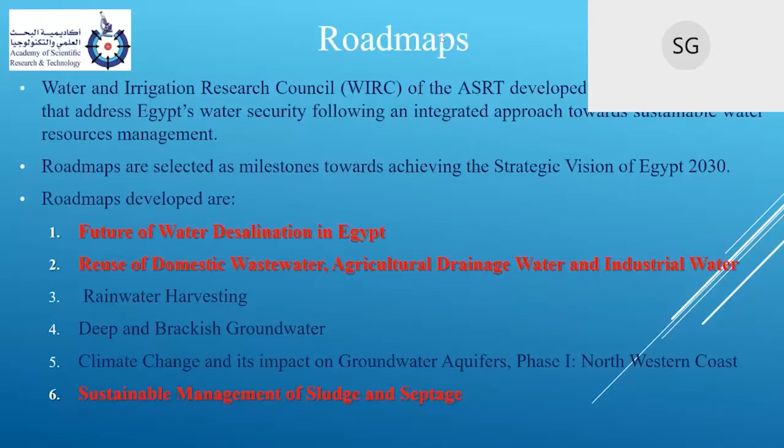A third one on rainwater harvesting. A fourth one on deep and brackish groundwater. And lately, we just finished 2 roadmaps, one on climate change and its impact on groundwater aquifers, and for the first phase, we concentrated on the northwestern coast. And last but not least, the sustainable management of sludge and septage. So today, we're going to present to you three roadmaps, the ones highlighted in red, and the first one will be on the water desalination roadmap.

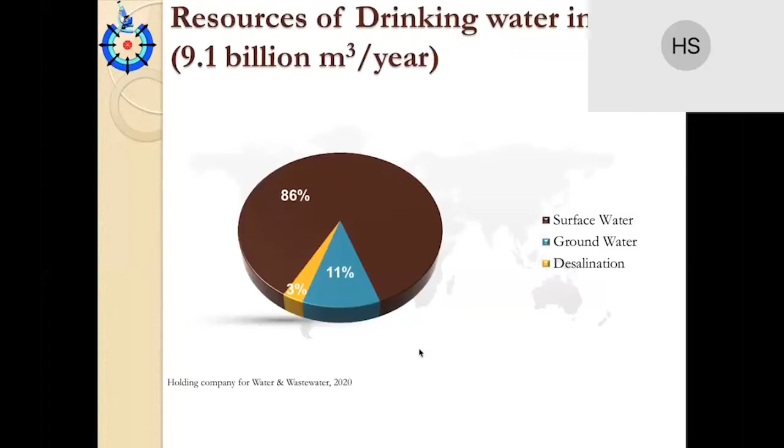We are drinking 9.1 billion cubic meters per year. 86% of these are from surface water, 11% from groundwater, and 3% from desalination.

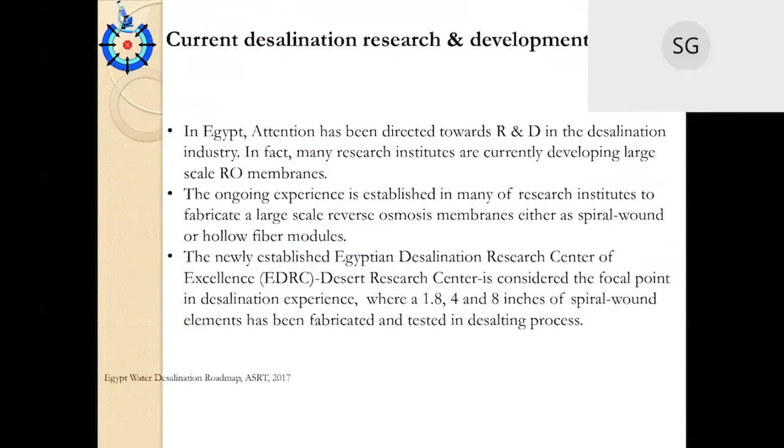Something goes wrong. Actually, I don't know why the presentation keeps moving. Okay, I will present like that because actually something is wrong with the slideshow.

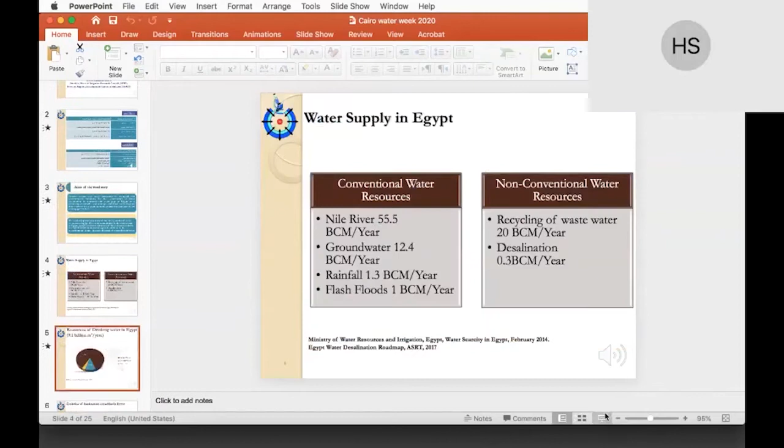When we made the first roadmap for the desalination in 2011, this number was expected to be 1.5 million cubic meter per day in 2037. And when we made our second roadmap, we were estimating that this number will be 2.6 million cubic meter per day.

But 1 month ago, this number actually jumped to be 8 million cubic meter per day as presented by the Minister of Irrigation. And we are expecting, in the year 2050, to be 20 million cubic meter per day as desalination. So the number is actually going very, very fast in the desalination.

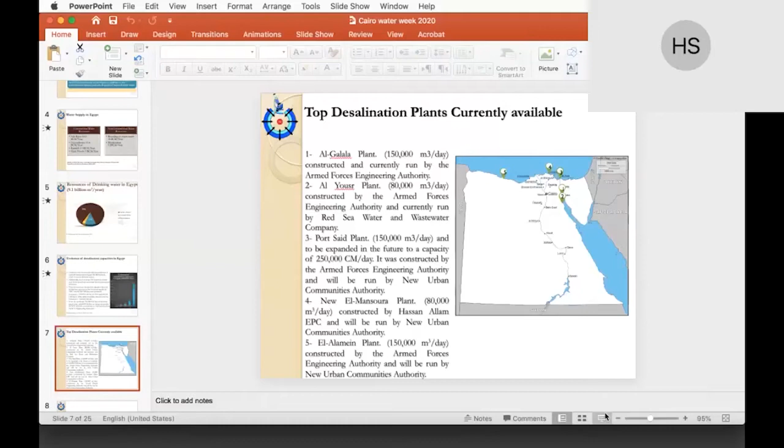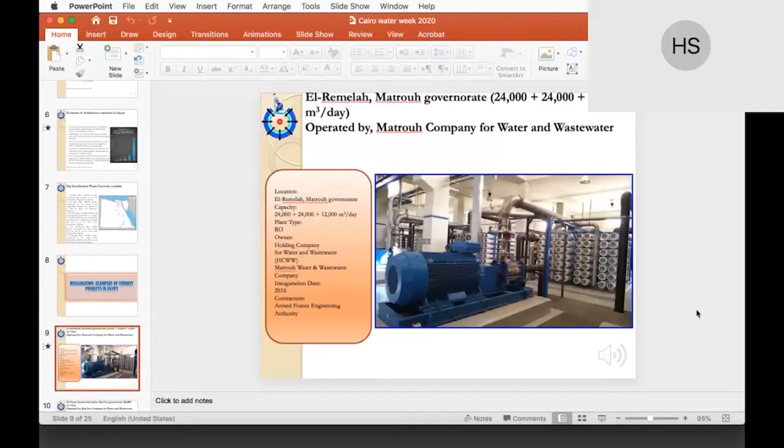These are some examples of our desalination plants and also the operation, because actually operation and maintenance of the desalination plants vary from one location to another. So, for example, in Matrouh, El-Remelah desalination plant, which is 48,000 cubic meter per day, is operated by Matrouh Company for Water and Wastewater. Another desalination plant, Al Yousr, is operated by Red Sea Company for Water and Wastewater, which is 80,000 cubic meter per day, as I mentioned before. El Galala desalination plant is operated by the Armed Forces Engineering Authority.

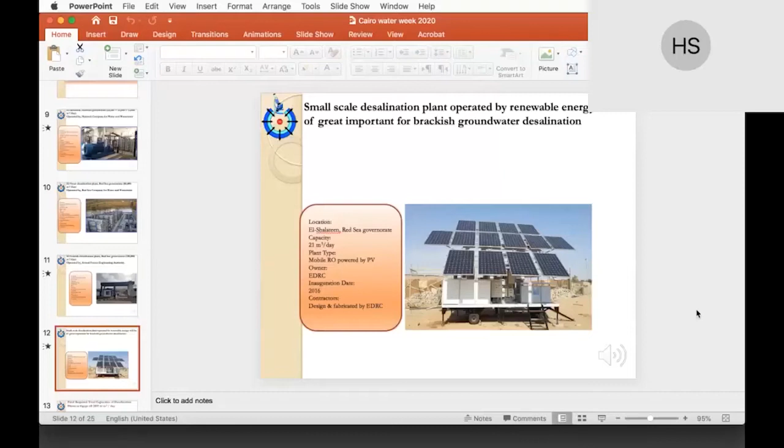And also we have some small desalination plants which are operated by renewable energy and depend on brackish groundwater. These kinds of desalination plants are getting much attention in Egypt now, because the cost of the desalination plant depends on the salinity of water. So if you have brackish groundwater, you will have desalination with minimum cost rather than desalination of the Red or Mediterranean Sea. But of course, this type of desalination plant will always be on a small or even very small scale, located in some areas.

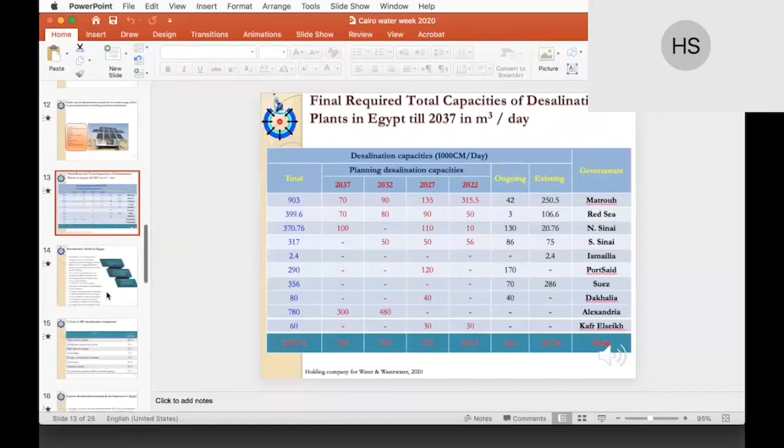Okay, we have desalination plants. What about the desalination tariff, which is very important in our roadmap? The construction cost of 1 cubic meter of desalination plant capacity varies from $800 to $2,000 US dollars per cubic meter. For the mega project, the number is 800, and this number increases as the size of the desalination plant decreases. 25% of the construction cost of the desalination plant represents the annual operating and maintenance. Power consumption is 4 to 4.5 kilowatt hour per cubic meter. This is the electricity consumption. And this number can be reduced by a lot if we work with groundwater or brackish water desalination plants. The power consumption will be lower.

13 Egyptian pounds is the tariff cost of the cubic meter of desalination by the Holding Company for Water and Wastewater. The cost sharing of the 800 US dollars: the high pressure pump represents 20%, membrane represents 15%, and the other cost is 65%. But the most important two costs of the desalination plant are the high pressure pump and the membrane, and also the membrane represents nearly 1/3 of the maintenance cost of the desalination plant.

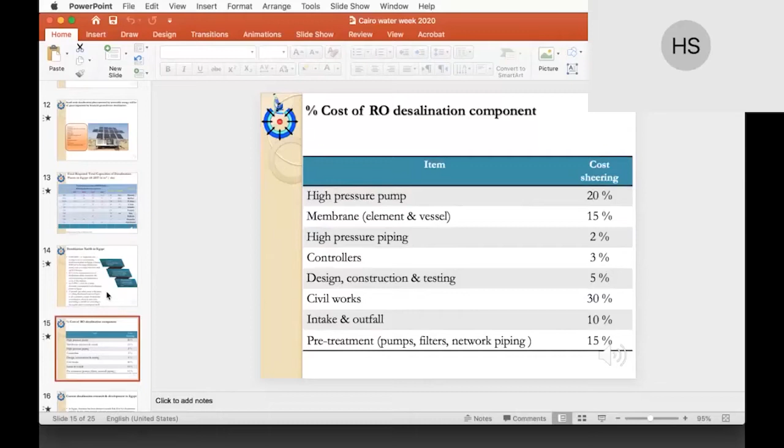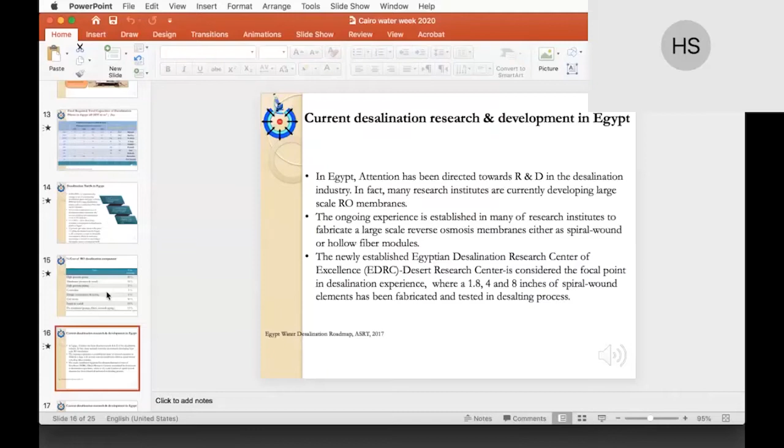Actually, the desalination R&D in Egypt is also going in parallel with the desalination plants being constructed. So we have a lot of ongoing research. For example, we have a newly established EDRC, which is the Egyptian Desalination Research Center of Excellence. In this center, they are conducting a lot of research concerning R&D, and specifically the fabrication of the membrane element. As I mentioned, the membrane element represents 1/3 of the operation and maintenance cost of running a desalination plant.

We also have the Water Desalination Alliance, which is conducted by the Academy of Scientific Research and Technology. In this alliance, we have two main R&D groups working on the high pressure pump, and we succeeded in building the first high pressure pump in Egypt, which is a 200 cubic meter per day high pressure pump. We also succeeded in rolling the first 4 and 8 inch RO membrane elements as the first step of the alliance, and we expect by the end of the second step to have the 4 and 8 inch RO membrane elements completely fabricated in Egypt.

We also actually succeeded in designing and manufacturing the first desalination membrane element fabrication line in Egypt, consisting of a casting machine, a coating machine, and rolling machines.

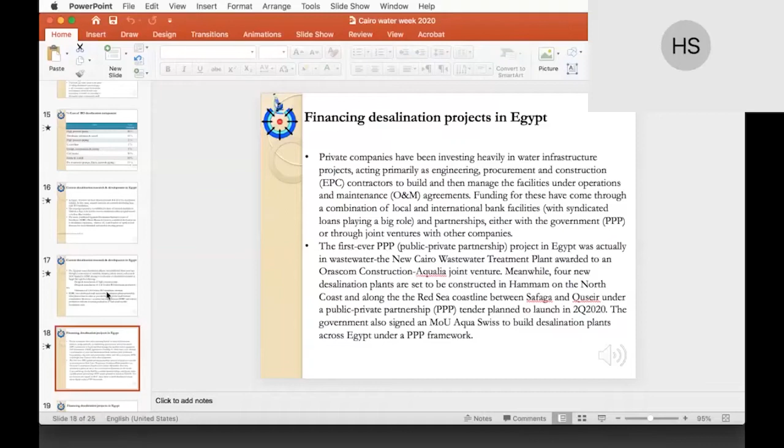Financing of desalination projects was also an important part of the roadmap. Most of the finance now is from the government, but private companies are also investing heavily in water infrastructure projects. Until now, it has focused mostly on wastewater, but the future of PPP, public-private partnership, in desalination is expected to be in 4 new desalination plants in El Hammam, the North Coast, and along the Red Sea coastline between Safaga and Quseir under a public-private partnership. The tender is planned for the second quarter for these 4 desalination plants.

Orascom is also investing a lot in the wastewater sector, and they are also part of the desalination plant in El Galala, as I mentioned before, and Hassan Allam are financing the desalination plant in New Al Mansoura.

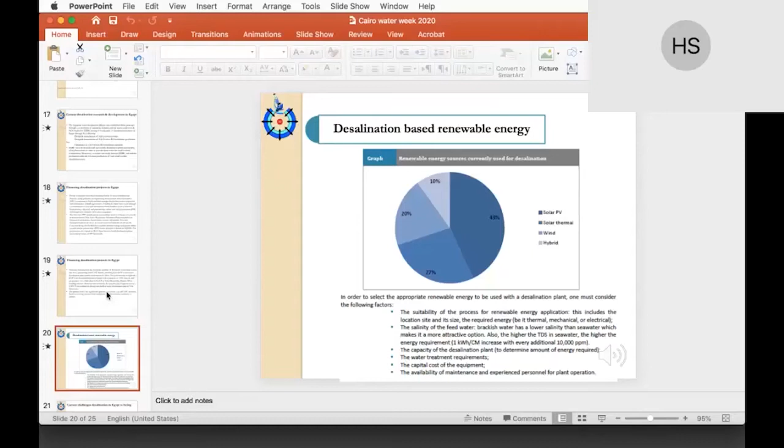Renewable energy, and the use of renewable energy to power desalination plants, is considered a lot in our roadmap, because, as I mentioned, power consumption represents nearly 40 to 45% of the cost of a cubic meter of desalinated water. So relying on renewable energy is receiving a lot of attention, especially solar PV. Some desalination plants running on solar are found, especially groundwater desalination plants and small scale desalination plants. Solar PV represents 43% of the renewable energy used in desalination plants.

The challenges of financing desalination plants in Egypt are many. Among them: government guarantees for contracts, lack of a constitutional setup to regulate the relationship between the private sector and government, the regulatory framework in Egypt, public infrastructure readiness, water tariffs and selling price, high energy consumption, high investment and operational cost, lack of local expertise and know-how, and environmental impact and health effects.

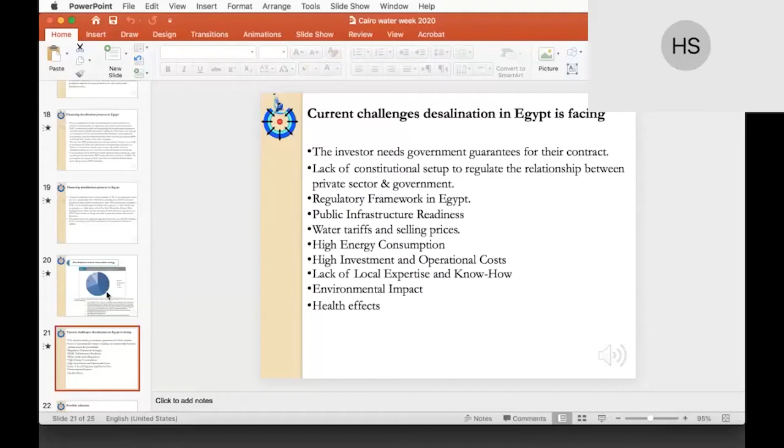Possible solutions are to increase capacity, knowledge and value added to the economy from desalination, including plant design, manufacturing and construction; create incentives to attract local businesses to invest in manufacturing, designing, building and operating desalination plants with a local and Arab labor force to attain economic sustainability; expand and support digital self-training programs; set up extensive educational specializations and social partnerships in desalination and water treatment; and develop a national plan for the use of renewable energy and reduction of energy used in desalination.

Develop comprehensive environmental legislation related to desalination, selecting a representative for authorities and agencies to give desalination units licenses, and a concerted effort by all parties and bodies involved in water desalination in Egypt to develop a map of seawater desalination coastal areas.

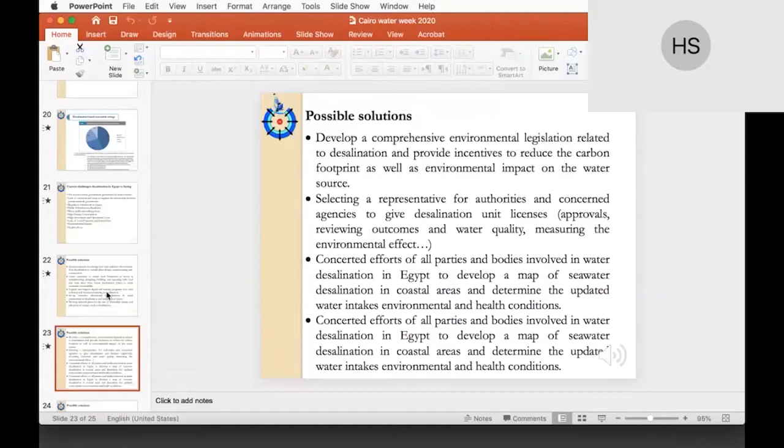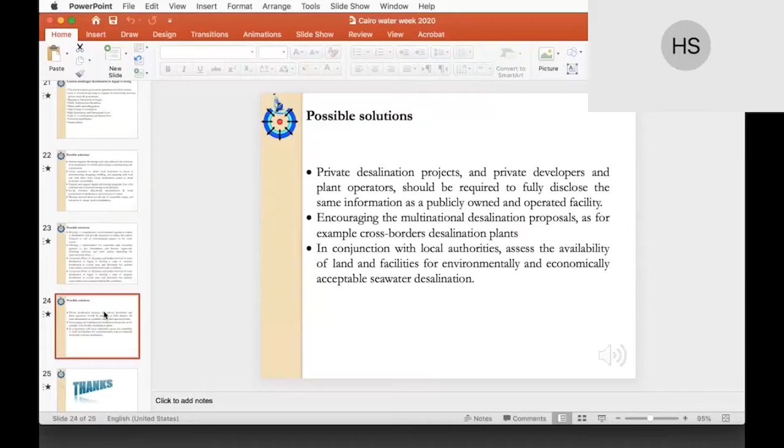Finally, private desalination projects, private developers and plant operators should be required to fully disclose the same information as a publicly owned and operated facility, encouraging multinational desalination proposals, for example cross-border desalination plants, in conjunction with local authorities assessing the availability of land and facilities for environmentally and economically acceptable seawater desalination. Thank you very much.

Thank you very much, Dr. Hossein, for your informative presentation about the future of desalination in Egypt. In fact, you highlighted very important points regarding the current and future situation of desalination and how desalinated water can play a vital role in closing the gap between supply and demand.

I would like to add one thing to this, that the STDF, the Science and Technology Development Fund, has funded several projects on desalination based on the output of this roadmap, highlighting the different focuses and different areas that could help in adopting this technology in Egypt through the roadmap. It also helped us through the fund organized or supported by the STDF.

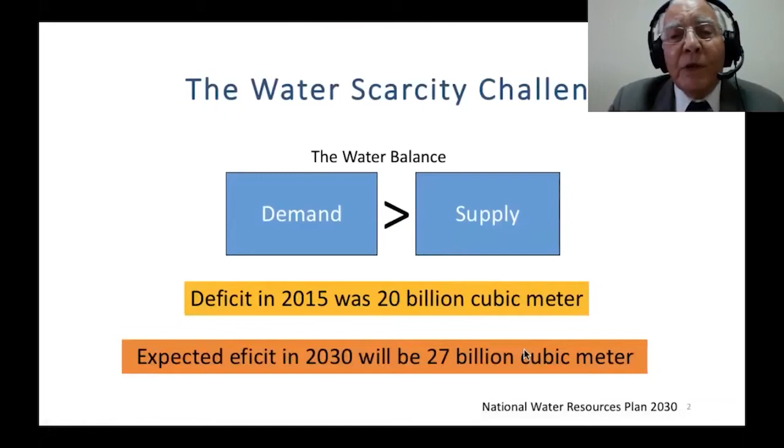I think the starting point, when everyone talks about new water supplies, is the deficiency between supply and demand. We have demands exceeding supply, and the deficit is increasing every year due to population increase. In 2015, the deficit between supply and demand was 20 billion cubic meters. Expected, according to the National Water Resource Plan, in 2030 it will be 27 billion cubic meters. What is the country doing about this? There are different options and different strategies. Number one is non-conventional water reuse, which includes agricultural drainage water and treated wastewater.

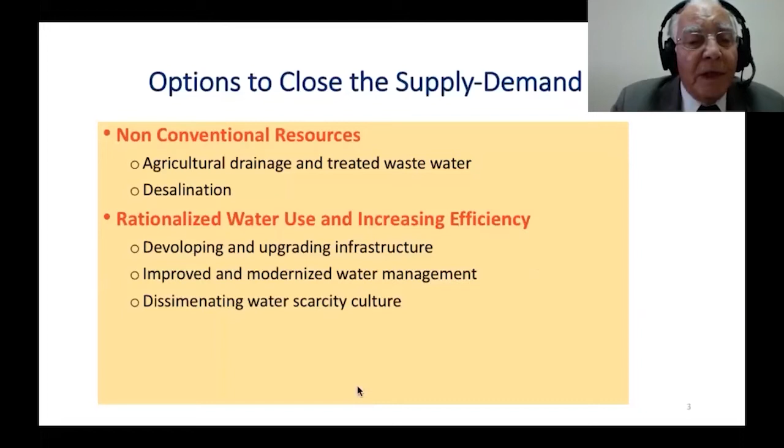Desalination was covered by my colleague, Dr. Hassam Shaw. The second option is rationalizing water use and increasing efficiency, and this is the most important part because the user is part of those policies, not only the government. The last one is increasing Egypt's share of Nile water, and everybody is aware of what the country is doing to keep and defend our share, mainly through scaling up cooperation with the riparian countries, and second, by implementing shared projects to capture the upper Nile losses, which are tremendous and can satisfy many of the riparian countries.

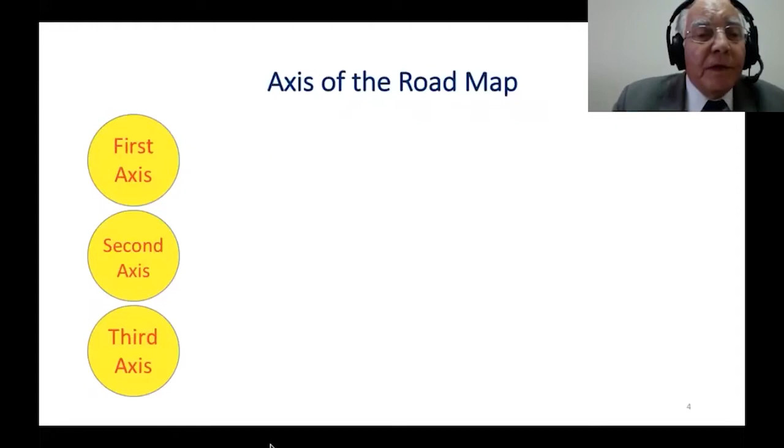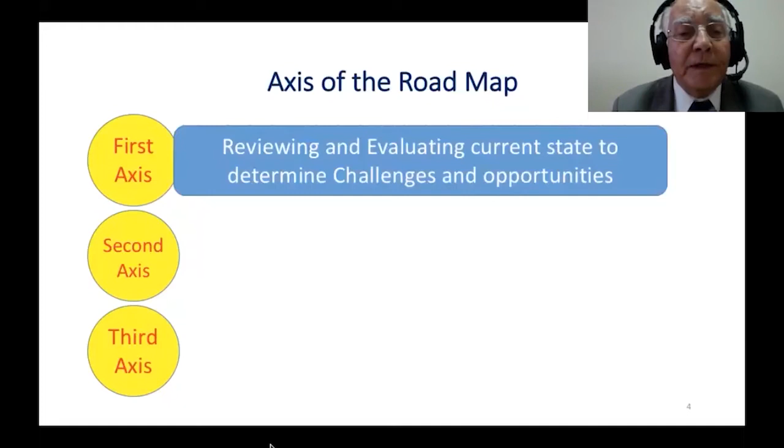In our work on this roadmap, two of these practices are the most related. One is agricultural drainage and treated water reuse. The second is developing and upgrading the infrastructure; as we shall see, it is a main constraint for expanding reuse. In preparing the roadmap for wastewater and drainage reuse, we took three axes for work. The first was to review and evaluate the current status in the country and determine the challenges and opportunities to scale up the reuse of treated wastewater and drainage. The second is about defining opportunities for applying cost-effective and energy-saving technologies.

An underlying fact for all non-conventional water is that they involve expenditure and high investments and require energy to be available. So cost-effective, energy-saving technologies are most important. The third route for developing our roadmap was formulating an executive plan for the roadmap during the next 10 years.

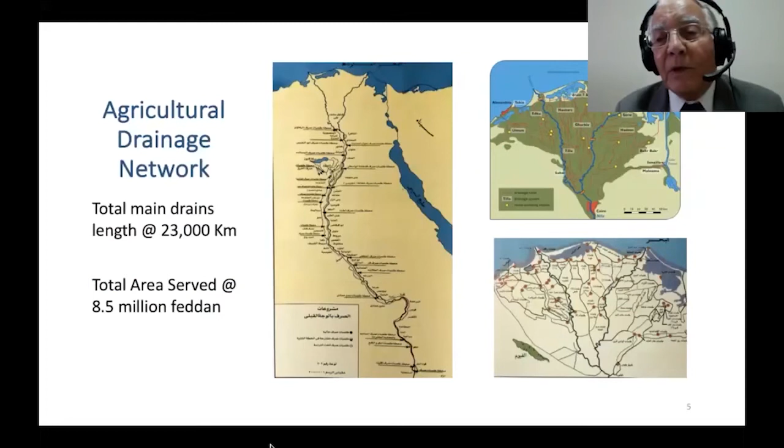Talking about drainage, I think these maps are familiar to many of us. We have a very extensive drainage network covering all the agricultural land of Egypt. The main drains alone are 23,000 kilometers. Plus the branch drains and field drains, they come to maybe 70,000 kilometers altogether, serving a total area of about 8.5 million feddan. This is about all the cultivated or irrigated land in Egypt.

Reuse in Egypt takes two modes. The first is the official one, designed, planned, and carried out by the government by building a mixing station, taking water from main drains and pumping it into canals, and this can happen at the main drain level or branch level; it's called intermediate drainage reuse. The other option is very well known. This is an unofficial option when farmers find a shortage of irrigation water. The farmer, with his diesel pump at the nearest drain, pumps drainage water and applies it directly to the field. So the terms direct and indirect drainage water reuse refer to these two options.

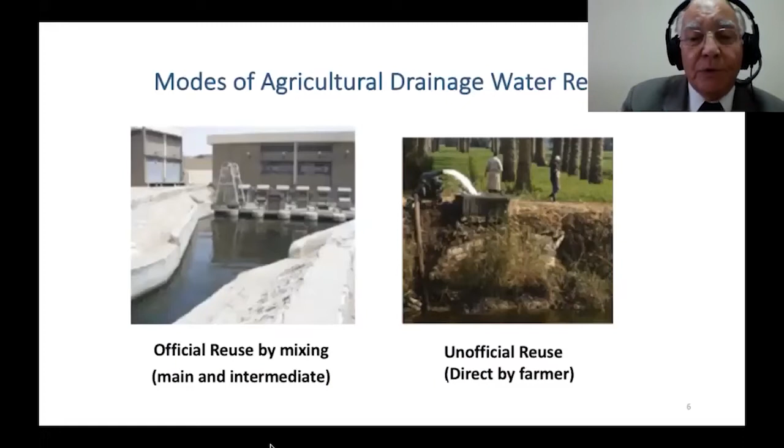Well, if we look, the country actually started the drainage reuse policy in the 1970s. During this time, there was an evolution of the quantities reused for irrigation in Egypt. I have to mention that irrigation, or agriculture, is the largest water-consuming sector, consuming about 85% of our fresh water.

Well, this is just a demonstration of some of the years, between 2009 and 2014, and we can see that the amount of drainage water has been increasing to almost 6.5. I understand that by the year 2020 it is about 7 billion cubic meters.

At the end of the system, the unused drainage water flows to the sea or the northern lakes. If we compare the salt load in both the reused drainage water and the drainage water to the sea, we can see that the drainage water to the sea is much more saline. If you look into the last years, 2012, 2013, 2014, 2015, we see that it becomes more saline as we reuse more drainage water.

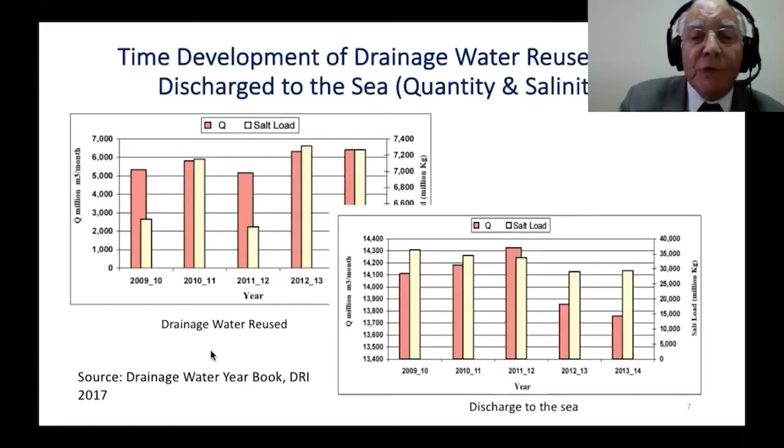I want just to give more explanation to this fact, because some people do not realize the quality of drainage water. Groundwater in Egypt is more fresh towards the south part of the delta, north of Cairo, and as we get closer to the sea, it becomes more saline due to seawater intrusion. I just wanted to give this explanation again.

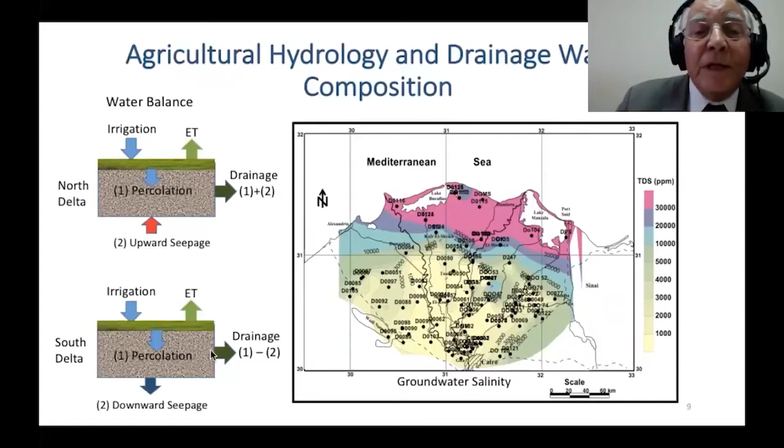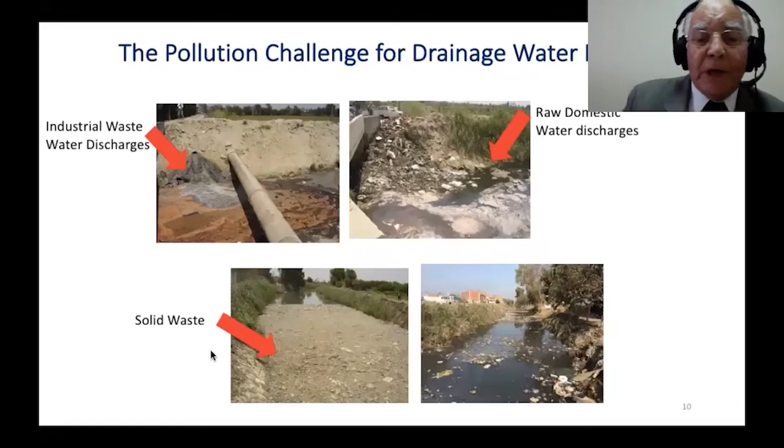The second great problem for drainage water is pollution. Pollution in Egypt has been an increasing trend since the end of the 1980s and 1990s. And unfortunately, agricultural drains became the dump place for either untreated or partially treated wastewater and untreated industrial wastewater. Also, solid waste became a problem for many of the drains, as we see.

The implications of pollution are many, and they have social and economic impact for Egypt. Number one, health risk, of course. Number two is environmental degradation, and restriction on agricultural exports. Some countries refused to receive Egyptian agricultural products because they found residues of some unacceptable elements in the products, and that was a great loss for our economy.

Less opportunities for drainage water reuse, when the objective is to close the gap. Some of the main drains were eliminated or did not remain usable, and we lost the opportunity to use water from such drains.

The water strategy has set two scenarios for reuse of drainage water for closing the gap. The critical scenario is about 8.9 billion cubic meters per year in the delta area, and the optimistic one 14.15. And considering the constraints I discussed, these norms have to actually be part of what we do in the future.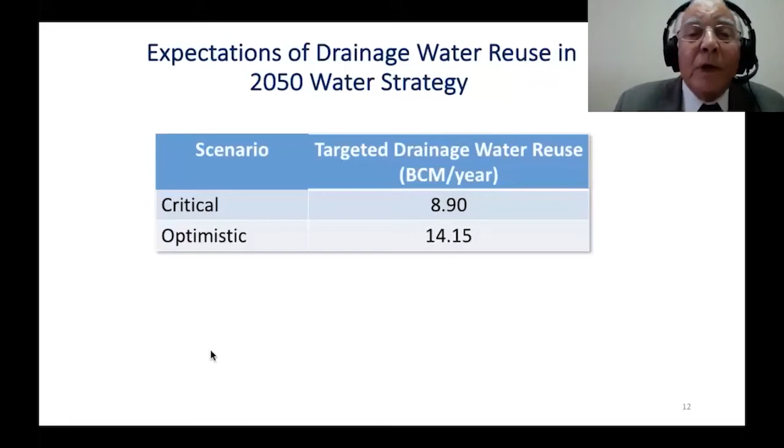So the phases of the roadmap that I mentioned in the beginning: we consider that 2 years are required for developing and modifying national strategies, plans, laws, and institutional arrangements, and reconsidering ongoing projects and programs according to the challenges and opportunities in the different geographical areas of the country.

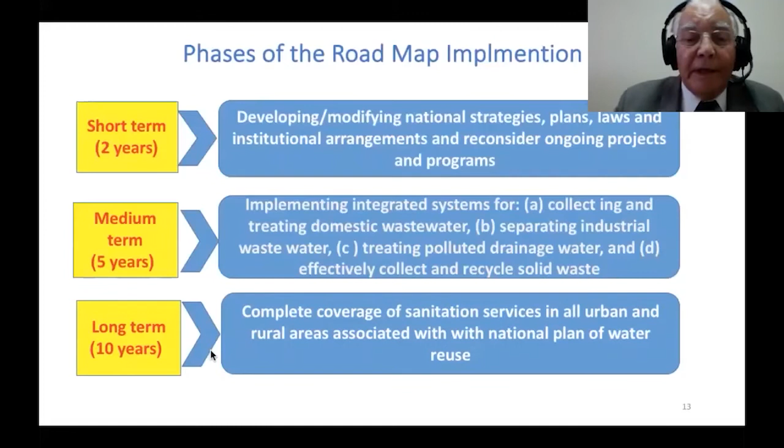The second phase is a medium phase for 5 years, and it consists of collecting and treating domestic wastewater, separating industrial wastewater from the treated wastewater, treating collected polluted drainage water, and finally effectively collecting and recycling. The long term is the dream phase, in which we have complete coverage of sanitation services in all urban and rural areas, and my colleague Dr. Refat will elaborate on this in the next presentation.

Finally, I will say that after developing the roadmap, new important developments took place in Egypt due to the rapid development ongoing. The first one is the irrigation modernization project under consideration by the Ministry of Irrigation, which means that on-farm irrigation will make a lot of savings. These savings mean a decrease in drainage water quantities and an increase in their salinities, and thus less drainage water will be available for reuse.

The second great development is the construction of giant drainage treatment plants, such as those in Mahsana and the end of Bahr al-Ba'r, which were highly polluted before. We heard about the commissioning of the Mahsana treatment plant very recently, and Bahr al-Ba'r is under construction, and this will mean more drainage water will be available from drains which have been excluded in the past. Thank you very much for your attention.

Thank you very much, Dr. Safwat, for your presentation, highlighting the current and also the future situation regarding agricultural drainage water use. We'll now move to the second part of this roadmap, dealing with wastewater reuse, and this will be presented by Dr. Rifaat Abdul Wahab. Dr. Rifaat is the head of the research and development sector of the holding company for water and wastewater. Dr. Rifaat, you have the floor for 10 minutes.

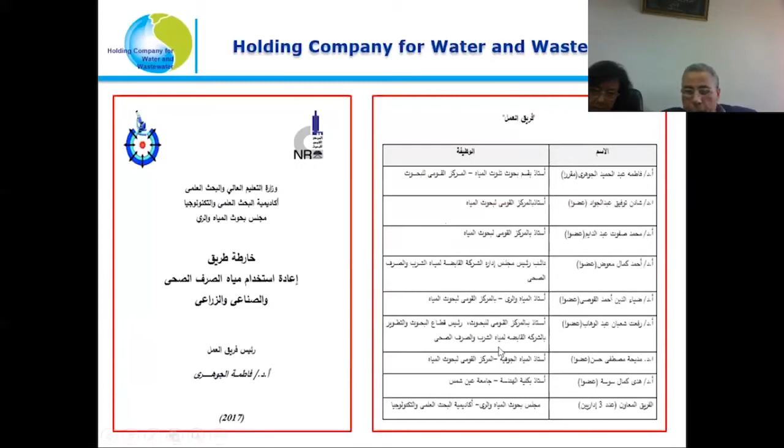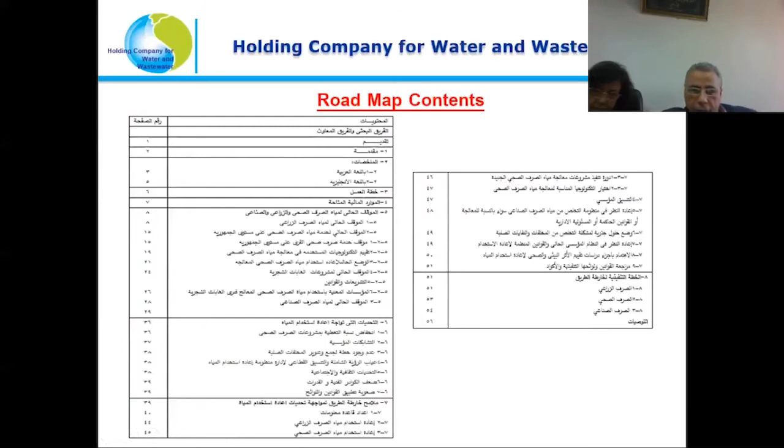The roadmap, as we see in front of you, is prepared by a high committee of the Academy of Science, supervised by Professor Dr. Fatma El-Gohary, and the respective members from different organizations, as we see in front of you. The content: there are many chapters, intensive work done for the wastewater reuse roadmap. Of course, when I'm talking about wastewater, I'm talking about wastewater reuse and agricultural drain reuse as well.

The current status of wastewater reuse in Egypt: there are three routes. Direct reuse, in Upper Egypt, Red Sea, and Canal cities and governorates, where you use wastewater from the effluent of the treatment plants. And indirect reuse, by mixing the wastewater, partially or fully treated or even untreated, into the agricultural drains, and it will be reused again, especially in the Delta governorates.

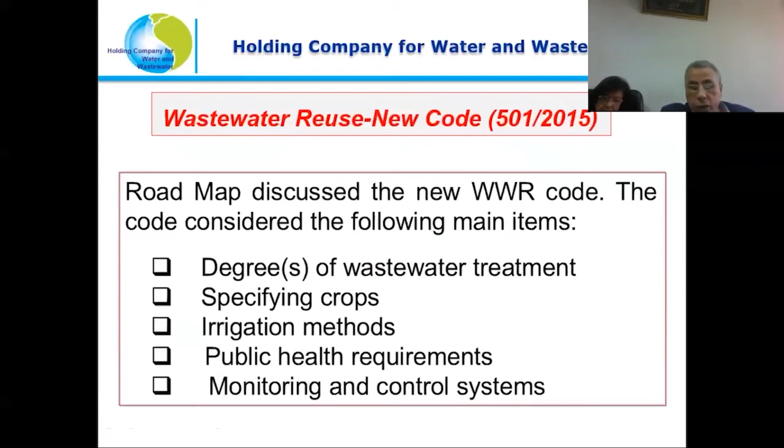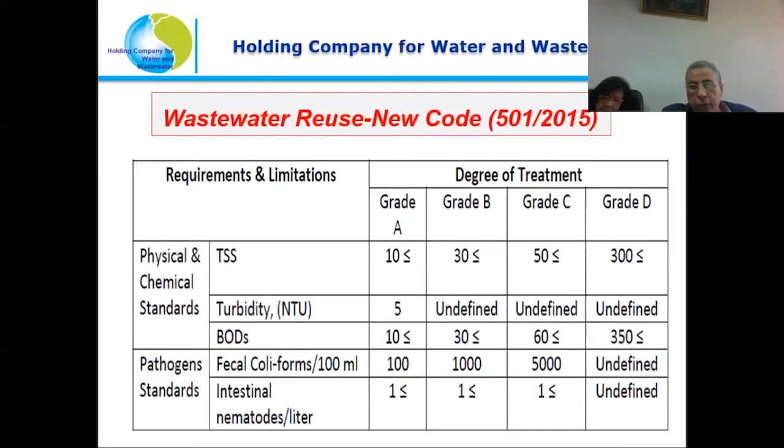However, the roadmap highlighted the quality of the wastewater itself, either mixed with drain or treated wastewater from the treatment plant. The roadmap highlighted as well the new code for wastewater reuse, the degree of treatment, specifying the crops, irrigation methods, public health considerations, and also the monitoring system. This is a new code for Egypt, and it is very important to consider it and to see how we can improve this code in the future. The roadmap highlighted as well the degree of treatment in 4 degrees, starting from primary till advanced.

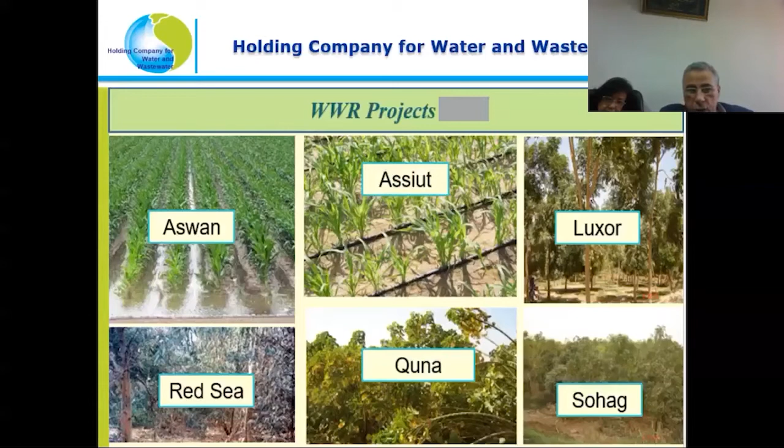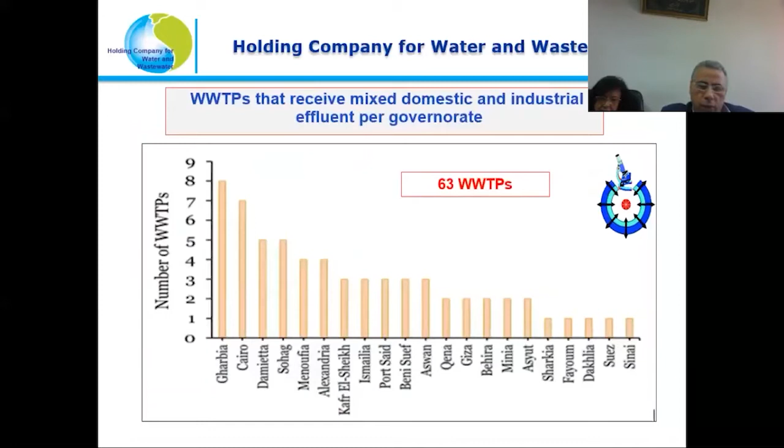This is very important, we discussed over 1.5 years for the roadmap the challenges facing wastewater reuse. As I explained to you, wastewater goes in two directions, I'm speaking about industry now: either directly to the wastewater network through the force main or to the drain, and in both cases, industry affects the viability and the replicability of some wastewater reuse projects. We have in Egypt more than 60 wastewater treatment plants that receive industrial wastewater, because industrial wastewater is mixed with domestic wastewater going to the treatment plants. The roadmap highlighted this part by developing a special strategy or vision for reusing such wastewater in these treatment plants.

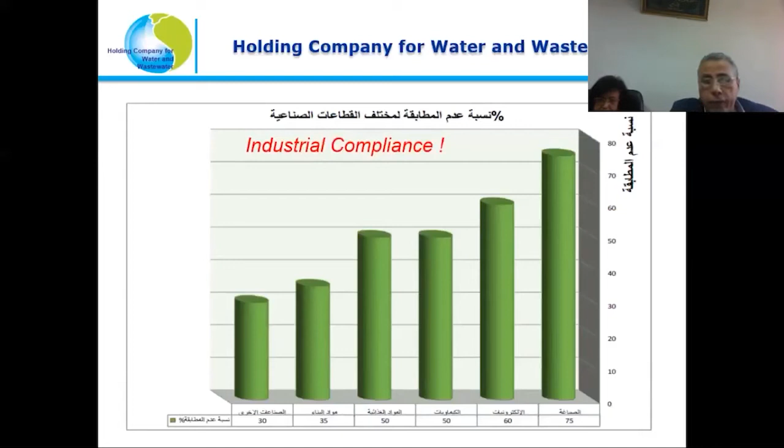I must also highlight the compliance action plan, the compliance of different sectors. This is really embarrassing because I must say the compliance is not in a good shape, and this is due to the lack of enforcement of the law. The second challenge, which is really important from my point of view as a holding company, is that an outcome of this roadmap is to solve what we call institutional entanglement, اللي هي التشابكات المؤسسية.

As you know, wastewater reuse projects and land allocation belong to nine different organizations and ministries. This is really the main challenge facing wastewater reuse in Egypt, and because of the limited time, I just highlighted the recommendation given by the roadmap to solve such a challenge by unifying the responsible organization. There are other challenges mentioned by Professor Dr. Safwat Abdeldaim, like the low coverage. However, the Ministry of Housing is now tackling those problems with the World Bank, with CWW, with the EU, and with others to cover the villages with rural sanitation services.

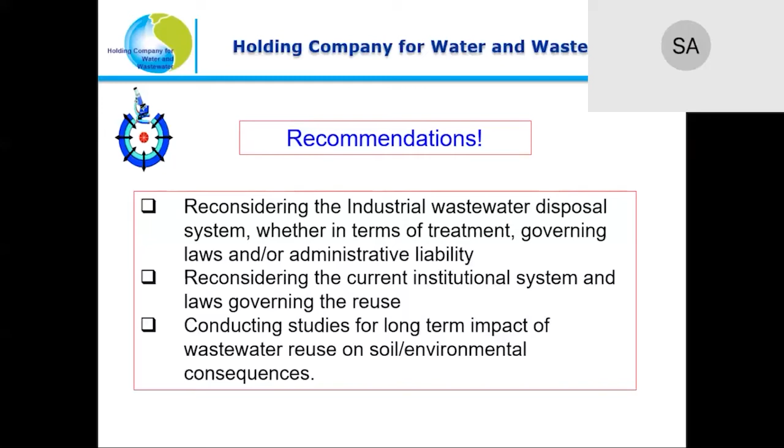The institutional framework is very important and needs to be solved and highlighted. And I think it's under consideration by the Ministry of Housing so far. Conducting studies for the long-term impact of wastewater reuse, soil and environmental consequences. This also needs to be considered, and it has been highlighted by the roadmap.

I want to say that there is a lot to say about the roadmap, but due to the limited time, I'm just picking up the most important points. Thank you very much for your attention.

Thank you, Dr. Rifaat, for your presentation, and I would like to assure all the attendees that the roadmaps are available on the site of the Academy, so you can have a look at those roadmaps in more detail, because we have only limited time to present the output of all roadmaps. Thank you again, and then we'll move to our last speaker.

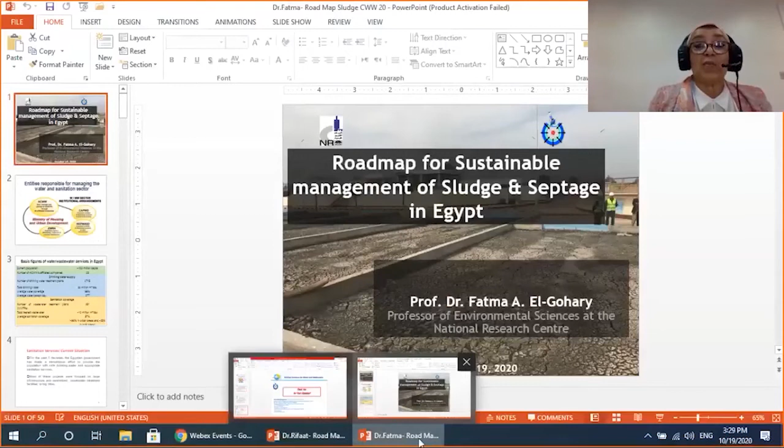We'll talk about the sustainable management of sludge and septage, and this will be presented by our eminent professor, Dr. Fatma El-Gohary. She's a professor at the National Research Center and an expert in water quality. Dr. Fatma, you have the floor for 20 minutes. And again, I would like to ask the participants, if you have any questions, please write down your question.

Dr. Challen. Yes, Dr. Fatma. Can you hear me? Yes, we can hear you. Okay, thank you, Dr. Challen. Is the presentation available on the screen? Yes, you can go ahead.

Thank you, Dr. Challen. I am going to talk about the problem in Egypt, and this is the treatment and disposal of sludge and septage in Egypt. The sludge is the solid part which is produced from the treatment of wastewater, either from centralized treatment facilities or on-site sanitation. This activity is carried out by the holding company and its 25 branches, by the Cairo and Alexandria Potable Water Organization, by NOPWASD, and the regulatory agency. All these entities belong to the Ministry of Housing and Urban Development.

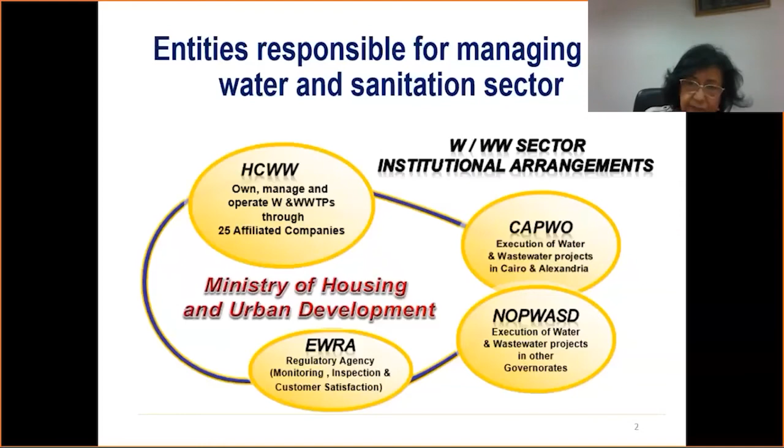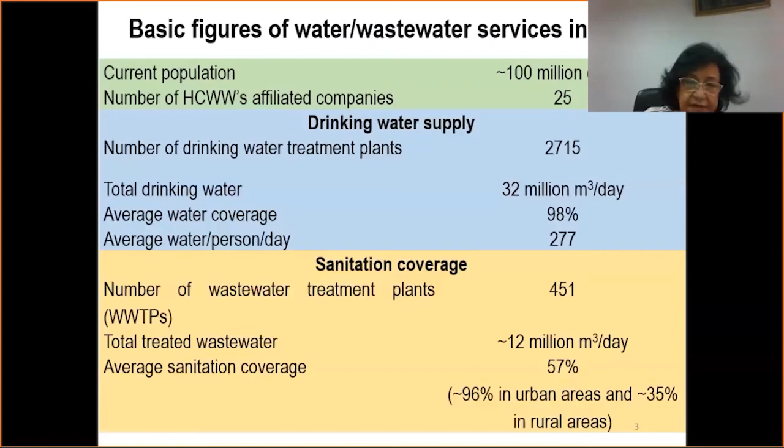These are some basic figures on the sanitation situation in Egypt. It is well known, so I'll skip it. The sanitation services in Egypt have been improved tremendously during the last 5 decades. We have to admit that a lot has been done in this sector, for both safe drinking water and proper sanitation systems. However, most of these projects were focused on large infrastructure and centralized wastewater treatment facilities in big cities.

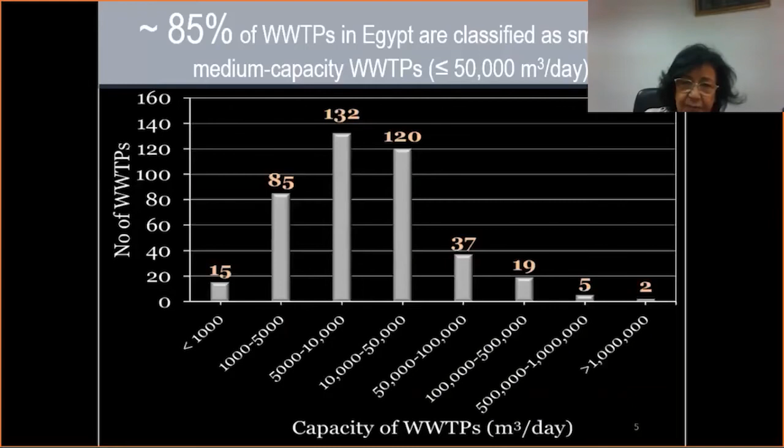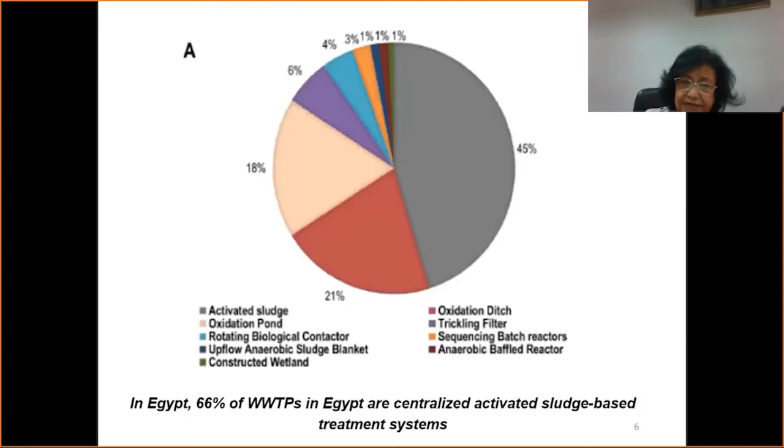If we look at this figure, we can see that most of the treatment facilities are medium and small size treatment plants. We apply here all the technologies known for wastewater treatment, ranging from activated sludge to oxidation ponds. But in Egypt, about 66% of the wastewater treatment plants are centralized activated sludge-based treatment plants. Why am I saying that? Because the sludge produced depends on the type of treatment, the efficiency of treatment, and different factors.

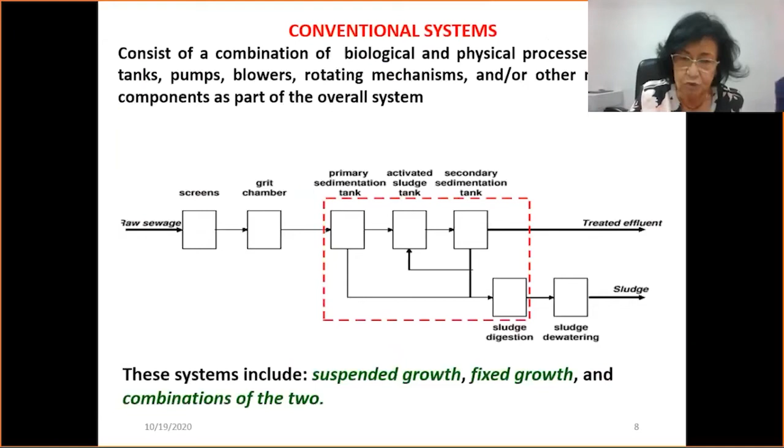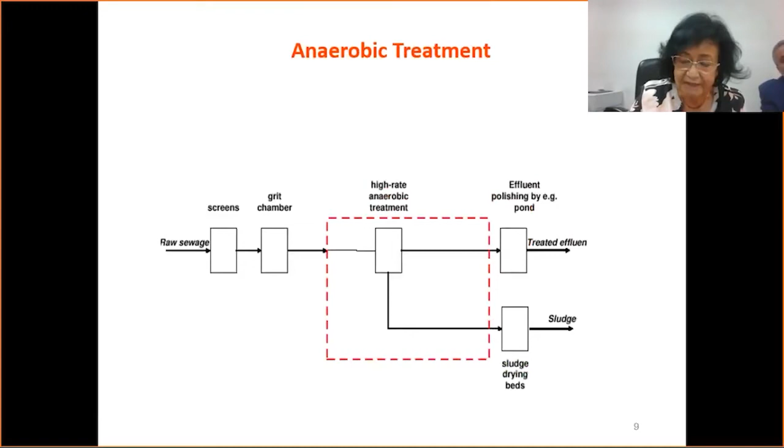This is a schematic diagram of a conventional treatment plant, starting from raw sewage to biological treatment and disinfection, and then the sludge produced is dried in drying beds. And this is also a schematic diagram of the biological treatment, whether it is suspended growth or fixed film. And the third type is anaerobic treatment. In the anaerobic treatment, there is no primary treatment. It is only anaerobic biological treatment. And this type of treatment is considered advanced primary treatment.

As I mentioned before, sludge treatment has been neglected. Why? Because it is very expensive. It accounts for 30 to 40% of the capital cost and around 50% of the operating cost. The quantity of the sludge depends on the quality of the incoming wastewater, the volume, and the composition. The type of wastewater treatment technology used also produces different types and different quantities of sludge.

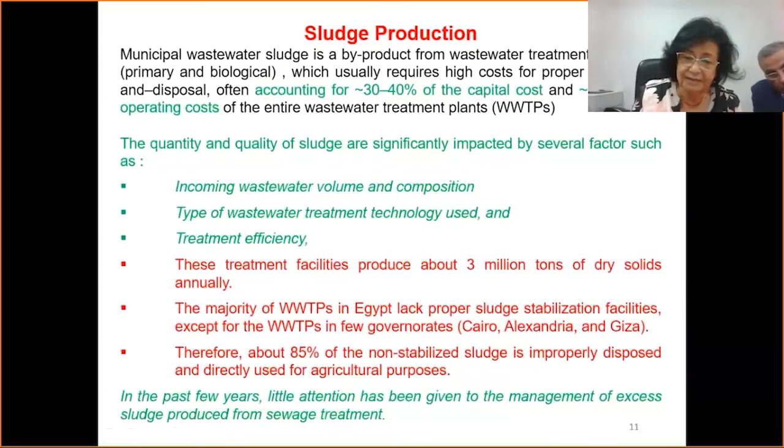The treatment efficiency. These treatment facilities in Egypt now produce 3 million tons of dry solids annually. The majority of wastewater treatment plants lack efficient treatment for sludge, so about 85% of non-stabilized sludge is improperly disposed and directly used for agricultural purposes. We have to mention here that sludge accumulates the pathogens in the wastewater and also the organic and inorganic pollutants. The solids in the sludge are around 1%, the rest is water, and the solids are 20 to 40% inorganic in nature and 60 to 80% organic.

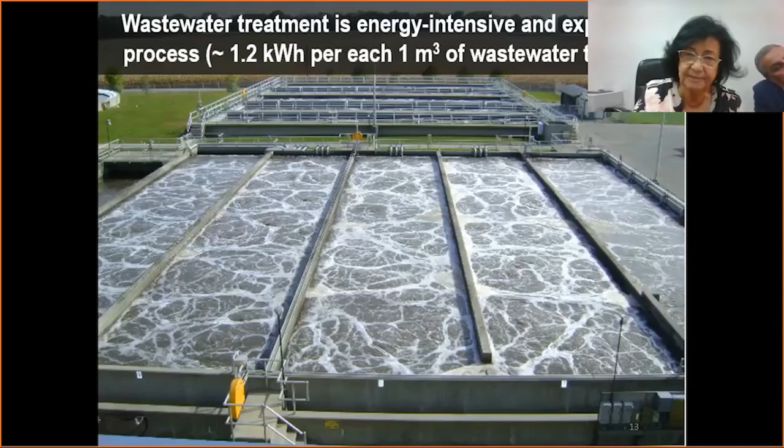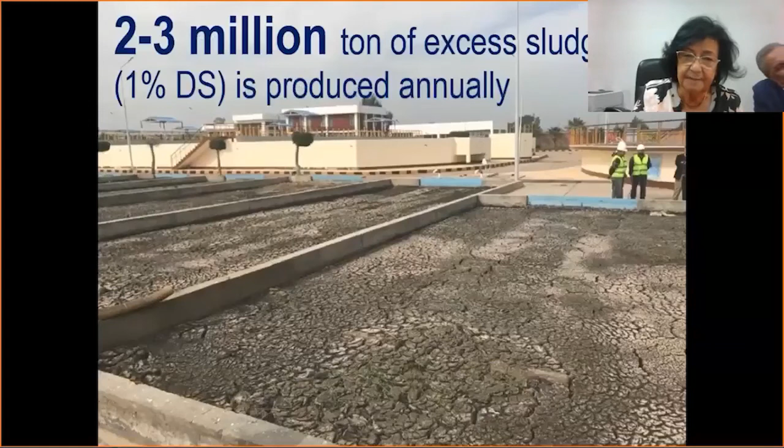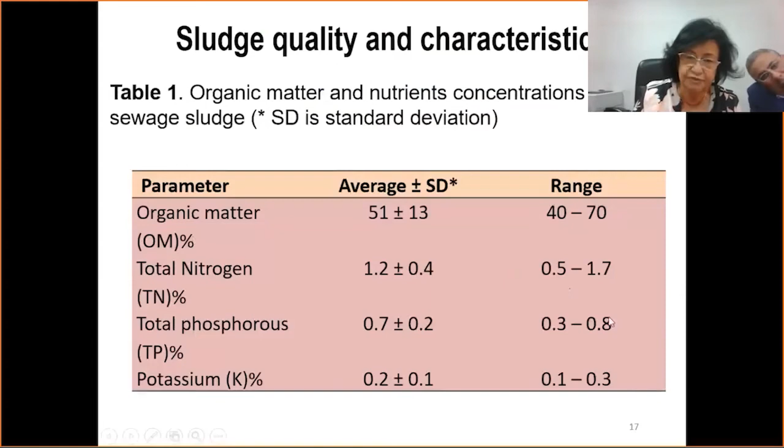And here we can see that the sludge contains organic matter ranging from 40 to 70%. This range depends on the factors I already mentioned. Total nitrogen, which is very important for agriculture, 0.5 to 1.7, phosphorus also, and potassium. These are nutrients very important to agriculture.

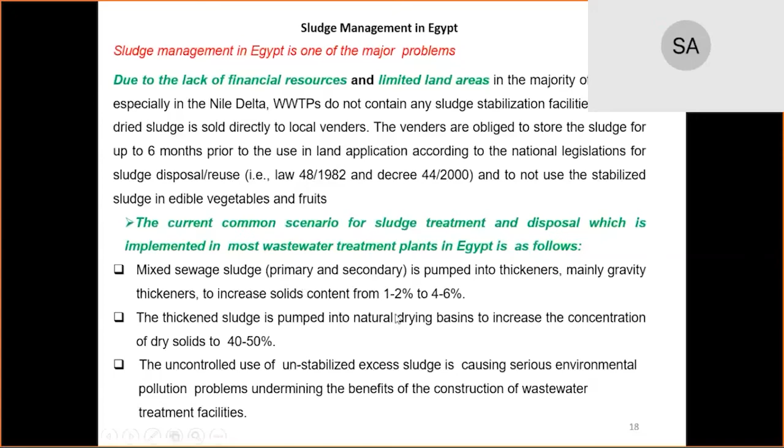The sludge management in Egypt is not as it should be, and this is due to lack of financial resources, because it is a very expensive part of the whole treatment. And even in the areas where it is dry, there is not enough land area available near the treatment facilities to allow for the sludge to be dried as it should be. So sludge is not treated properly.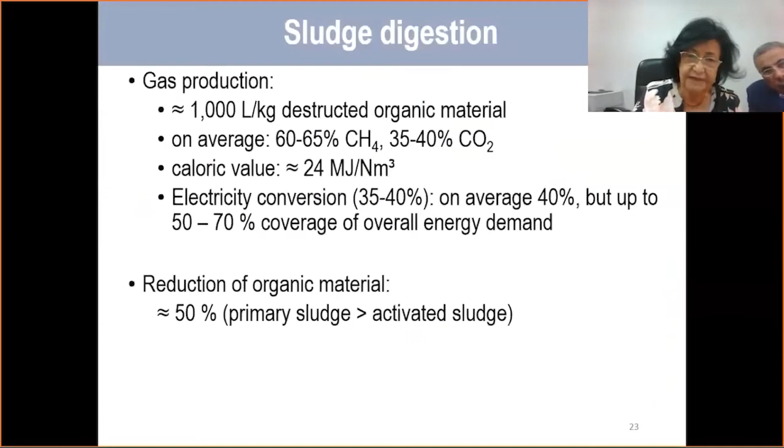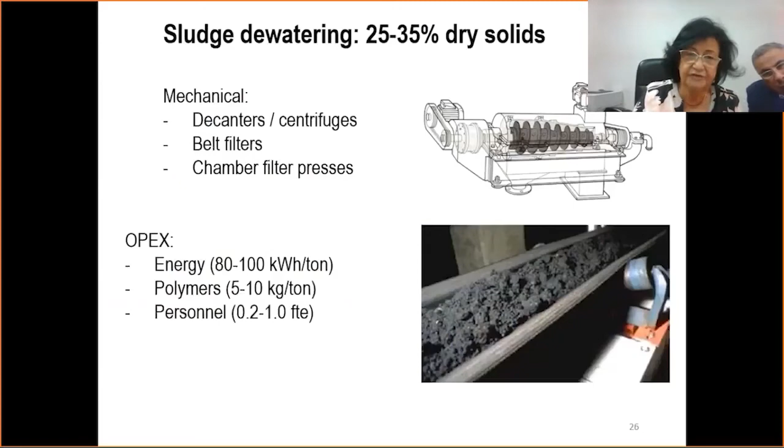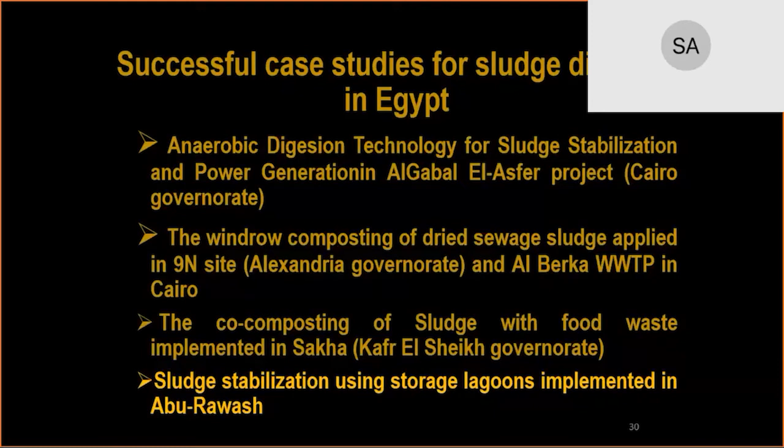This has been already mentioned by Dr. Refat. Luckily, the analysis of the sludge in Egypt indicated that the heavy metals did not exceed the limits for sludge use for agricultural purposes. Here in Egypt, we have successful case studies for sludge disposal: anaerobic digestion in Gabal El-Asfer, windrow composting in site 9N in Alexandria Governorate, co-composting of sludge in Sakha in Kafr El-Sheikh, and sludge stabilization using storage lagoons in Abu Rawash. This is Gabal El-Asfer sewage sludge treatment.

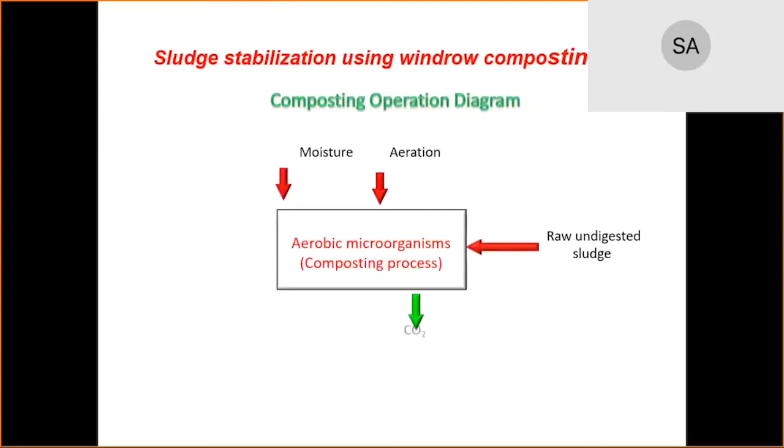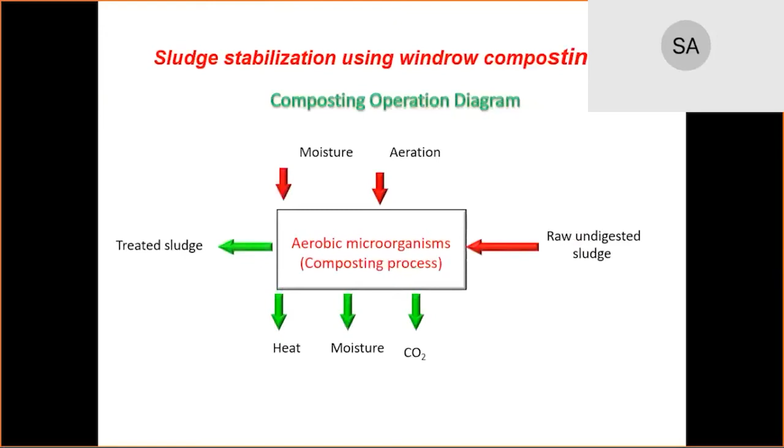The sludge stabilization using windrow composting. The sludge is transferred to an area prepared for the composting operation. The raw undigested sludge is aerated and mixed using these facilities until it is dried. This process increases the temperature to 60 degrees centigrade, and this kills most of the pathogens in the sludge.

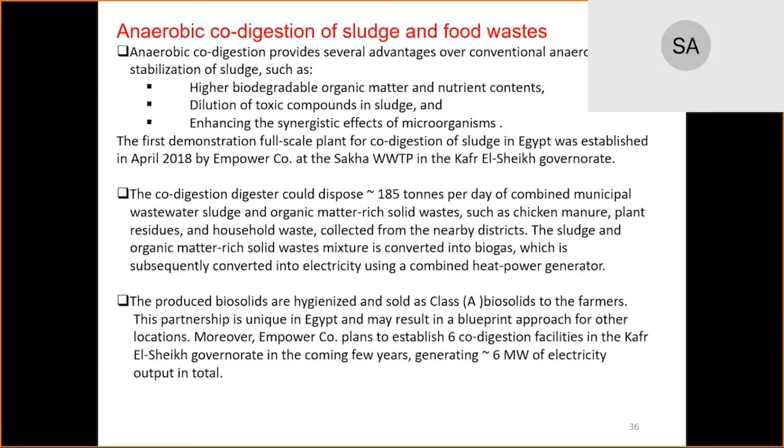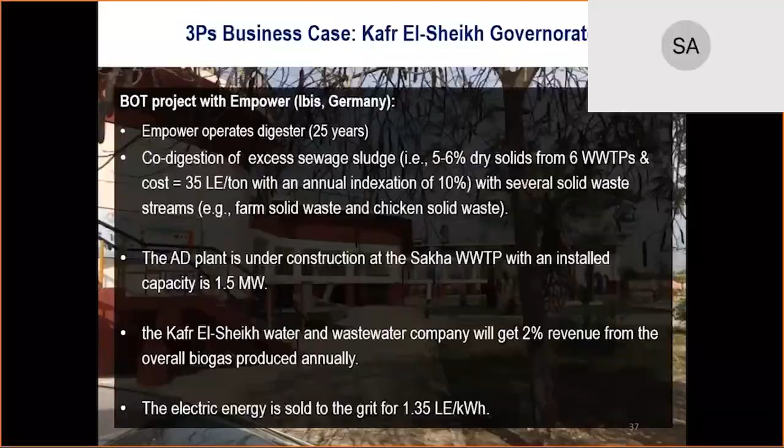The anaerobic co-digestion of sludge is done now in Sakha, and it is operated by the private sector. Sludge is co-digested with food wastes and the organic part of the garbage. This is Kafr El-Sheikh, Sakha. The digester.

Another option is to digest sludge in storage lagoons, and this is carried out in Abu Rawash now. The primary and secondary sludge produced from Zenein wastewater treatment plant is transferred to Abu Rawash, mixed with the primary sludge of Abu Rawash and goes to the lagoon there, where it is kept for years until it is mineralized. This is the way it is transferred.

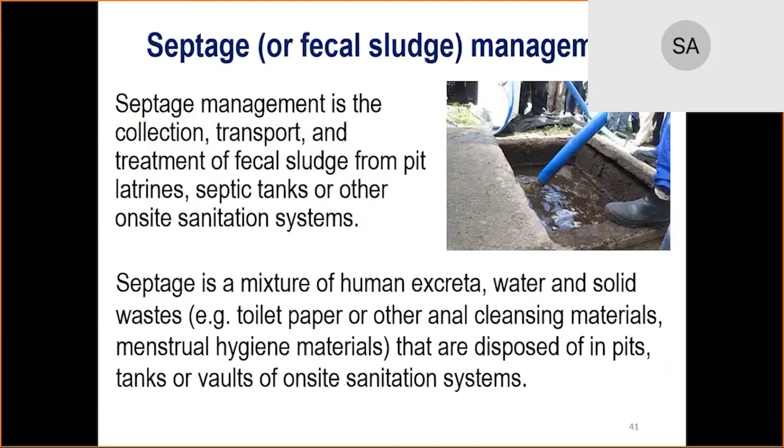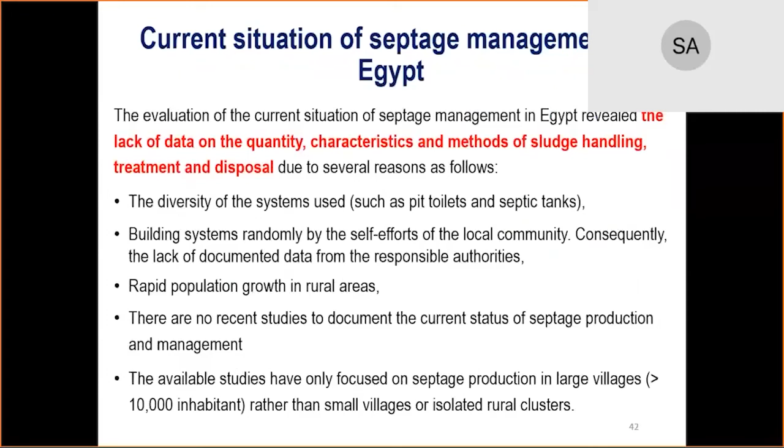Another important part of sludge is what we call septage. Sludge is produced from central treatment facilities, but septage is produced from on-site sanitation systems, ranging from pit latrines to septic tanks to small anaerobic treatment units. The septage in Egypt is produced from about 50% of the population in rural areas, and our study revealed that we don't have good information about the quantity or quality of the septage produced from on-site sanitation.

The reason is that these systems are built by the people, not under the supervision of any official organization. So we don't know what they are doing. We don't know whether these on-site systems are leaking to the groundwater or the groundwater is adding water to these units. So more studies have to be carried out.

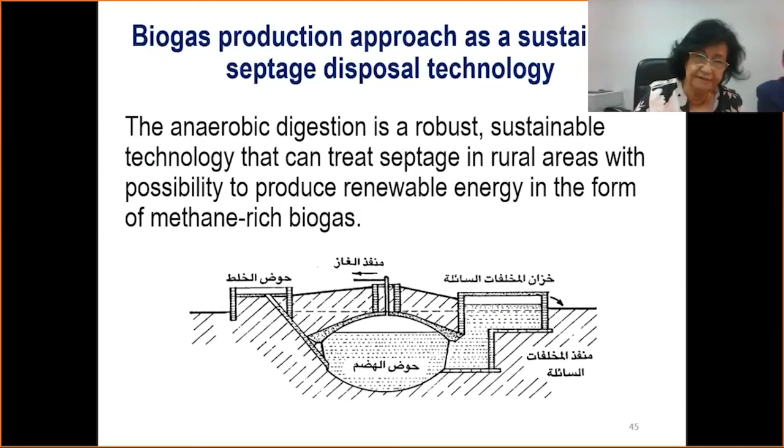The proposed technology, or one of the technologies, is anaerobic digestion to produce biogas, and these systems do exist under the supervision of some of the donors in rural areas, and we have two types of anaerobic units, the Indian model and the Chinese model.

So from our study, we can say that fecal sludge is our weak point in Egypt. The reason is that a variety of on-site sanitation technologies are implemented. The difficulty to measure infiltration and exfiltration in the systems in use, and the way of emptying and disposal, bring a high variability in the septage characteristics. So intensive surveys and studies have to be carried out. Also, we have to adopt and transfer technologies from other countries with similar situations.

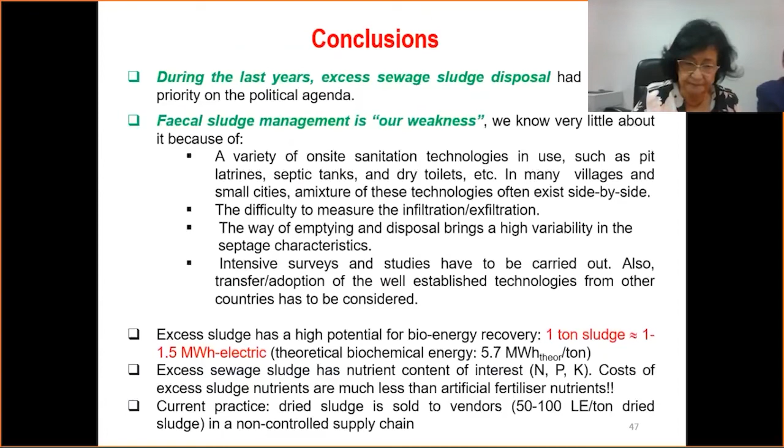The recommendation: construction of central sludge treatment facilities for sludge and septage. This means that we collect the septage from the different systems or from the different treatment facilities and treat it in a central sludge treatment unit.

We have to enforce the existing rules and regulations, also update the regulations, improve and update the quality of data on rural sanitation, encourage private investors to convert sludge into fertilizer and renewable energy, control the release of toxic chemicals from industrial sources into the sewer network to avoid accumulation of such chemicals in the sludge to optimize its use,

develop sustainable technology for sludge treatment and disposal, develop appropriate systems for treating septage, integrate rural sanitation in watershed management, and organize training courses for the operators, because I think there is a lack of knowledge in this area.

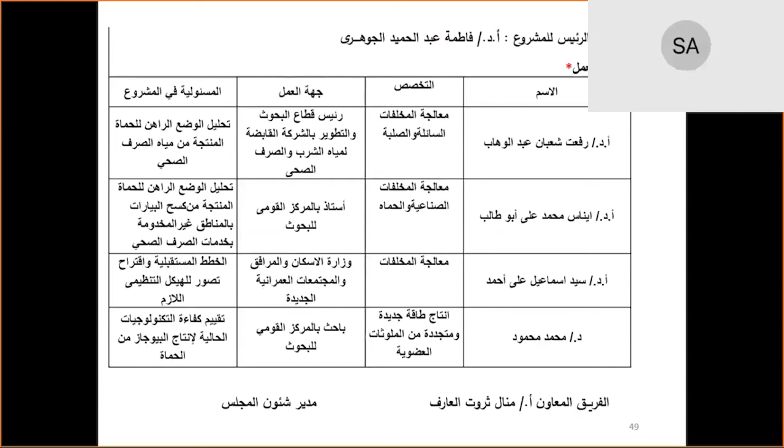Thank you very much, Dr. Fatma, for highlighting the current situation of sludge and septage, and what's the plan to control and manage the sludge in a sustainable way.

At the end of these three presentations of roadmaps, we have received some questions from the participants. We have a question addressed to Dr. Safwat from Engineer Nuran Marsafi. She's asking about where we stand now. So Dr. Safwat, you have the floor to answer the question raised to you. Yes.

The microphone now. Can the microphone be available for me? Do you hear me? Okay.

Well, thank you for the question. The question is very important. Actually, the future availability of drainage water for reuse is dependent on two factors, the quantity and the quality. Let me say that drainage water is the most readily available water for closing the gap, since we have agriculture and irrigation. Drains are receiving the excess water, and it could be considered the cheapest among all non-conventional water for reuse.